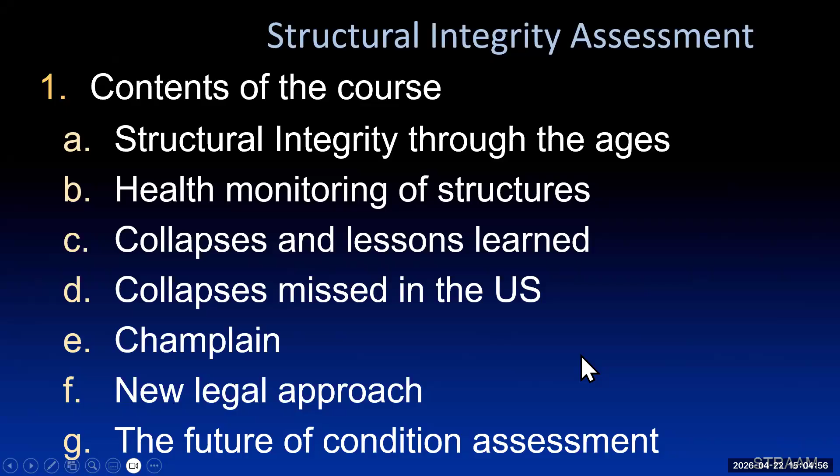This course is about structural integrity through the ages. We have about 10 slides on it: health monitoring of structures, collapses and lessons learned, collapses missed in the US, the Champlain Tower, the new legal approach, and the future of condition assessments.

In the ancient world you had master builders and military domination, structural design by stonemasons and carpenters. They principally did visual inspections - ironically that's kind of still what we do now, and we really should advance that. Technology advanced in the Roman Empire, as you can see with some of the arches in Europe and aqueducts and things like that.

The Romans were really pretty good at building things - many of those structures are still around.

The original approach to structural integrity from the design side was solid and stiffness overkill - they made things really robust, big, giant, massive structures. They believed mass would keep them together.

Interestingly, the concrete from Roman times is actually far superior to what we have now - a lot of it is still around, based on using volcanic ash.

The Romans created domes, vaults, and arches, and there was a lot of ingenuity involved in keeping everything under compression - the foundations provide a reactive force.

For maintenance they had self-repairing concrete, due to the ash used by the Romans - it's really pretty ingenious. Impinging forces were based on experience; they kind of figured it out as they went. I'd like to see how many things actually fell down because they didn't get it right initially. I don't think they were going through steep calculations with huge factors of safety, but they knew it worked because it stayed there.

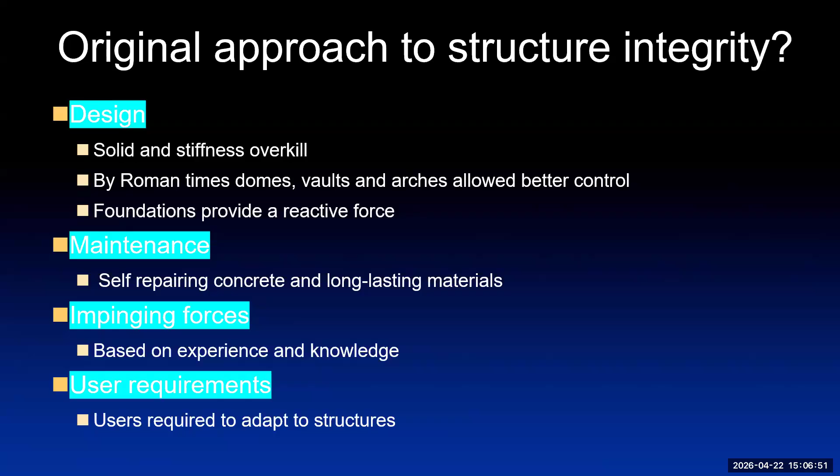User requirements - users were required to adapt to structures. So moving on to the Renaissance.

In the 14th to 17th century, there's a link between medieval and modern times - the Enlightenment, focusing on classical humanism, human potential, and literature. These slides were created by Alan, and I wish he was here to give them since he has more insight into this classical era - artistic innovation by Da Vinci, Raffaello, and Michelangelo, a move away from purely religious workings.

Different inventions, like the Gutenberg printing press, revolutionized communication.

That was really an amazing thing, a stepping stone for humanity. The heliocentric model allowed for worldwide travel and colonialism, ending with religious reformation and shifting political ideas in the Baroque era, with extravagant art and music. So a lot of interesting things were happening during the Renaissance.

The Enlightenment required that laws be rational, uniform, and acceptable. The Royal Society, of which Dr. Geary is a member, actually started in 1660. So they really started embracing science and institutionalizing it. John Smeaton was the first civil engineer.

Separation of architecture and engineering in the West occurred in the 1700s, when we start seeing the first schools of engineering. Then in 1818, the Institution of Civil Engineers was founded in London.

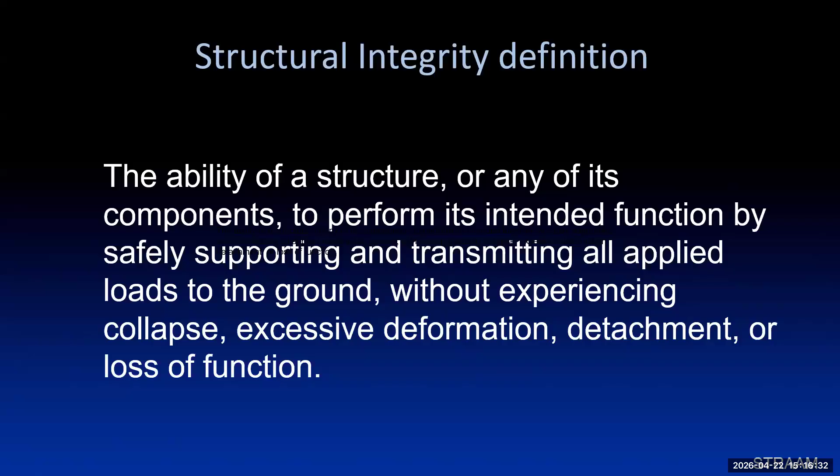So we have that definition coming up, but a general definition is the ability of a structure or any of its components to perform its intended function by safely supporting and transmitting all applied loads to the ground without experiencing collapse, excessive deformation, detachment, or loss of function. So it seems common sense, but I think structural integrity is a term that everybody has their own definition for. And it is defined in the codes, and that's what we as engineers should be using.

Framingham was a building that collapsed. Again, it was very common to things that happen now: rush to finish, poor design, lack of knowledge of required dead loads. Ferry Bridge in 1965 happened in the UK - those were big cooling towers, we've assessed those as well. And winds came and excited dynamic behavior. They were under-designed.

It says misunderstood construction. Alan Davenport, he did a work on the dynamic nature of wind forces. It was all around this time. It was an advancement for wind engineering. That's when Alan started getting his start in the industry.

So this is a really important one. This is still referenced in ASCE 7. Ronan Point is seen as the beginning of structural integrity. It was a progressive collapse from 1968, and some lady in one of these apartments was boiling tea. She had a gas leak. It exploded, it blew out a wall, and this was a manufactured building, and it created this progressive collapse.

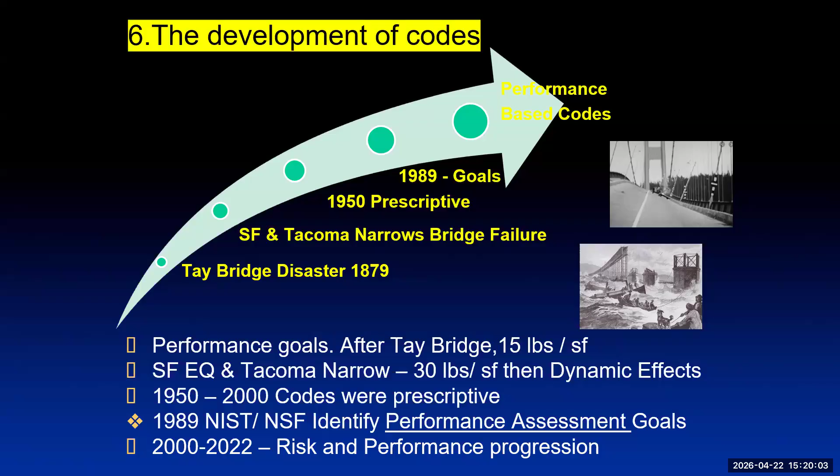There were dynamic measurements and mode or model calibration and a lot of different things. And now we're looking at risk and performance progression. So design standards are looking at performance, and there's performance-based design in ASCE 7.

Some other collapses missed in the U.S.: a department store in 1995 in Korea killed 500 people, and the owner was jailed. In other countries, especially Asian countries, they're much more rigorous about holding the engineer accountable. You can go to jail in other places. Here, you go to court, but your insurance company pays. Over there, it's a whole different animal.

The Rana Plaza collapse from 2013 in Bangladesh, that was tragic. I remember when that happened. 1,300 people died. That's a tragedy. It was a weak building, and they just overloaded it. They had a lot of machinery in there, and it eventually collapsed. A lot of different countries have questionable codes.

It's another reason, a justification for doing measurements on structures to objectively assess them. Because a lot of times these buildings get patched and you can't tell by looking at them if they've lost capacity. A lot of times, just before the engineer comes, they do that sort of patching.

As a matter of fact, for the Champlain Tower, that was one of the criticisms that the investigation showed—that the inspection program they had didn't have any testing, none. People were just mailing in assessments, from what I've heard and what was validated in that investigation. So we've got to get to a point of getting more accurate and effective inspections.

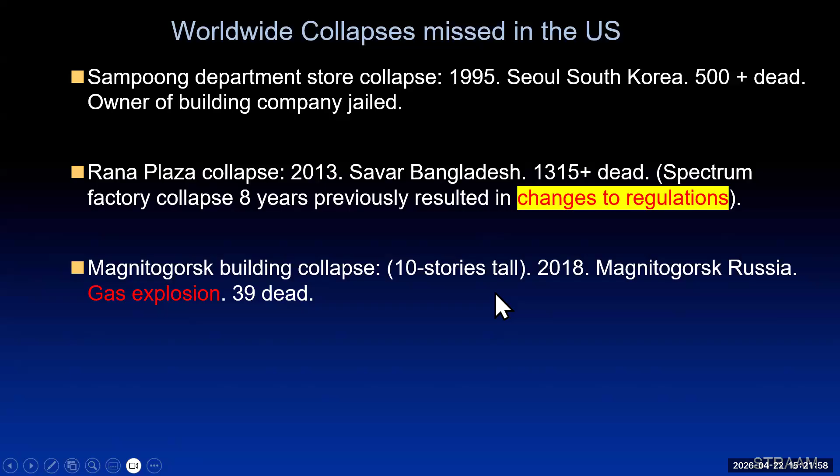So, this building collapse—the Magnitogorsk building collapse, a 10-story building in Russia due to a gas explosion. I didn't know that one. So Alan knows a lot of things that I don't know.

But this is the one that we all know, the Champlain Tower in Surfside. It was a 40-year-old building, just about. 98 people died, $1 billion loss.

What happened with this: in 2018, they estimated that the repairs were $9 million. There was significant damage, and they knew it. And the engineer—a lot of it gets patched, and he didn't really know how to assess it effectively.

By 2020, they estimated it to be 15 million. So in 2 short years, the degradation accelerated. And that's the problem with degradation—that's what people have to realize, is that it's not linear.

Just because you had a little degradation this week, in a year you might have 3 times that. You get chemical changes, chlorides hitting steel, they blow out the concrete, and it can look drastically different very quickly. It can be perfectly fine for 40 years and then look really bad really quickly. That's what was happening there. And the engineer's not on site all the time.

So we advocate for monitoring structures like that, and it makes a lot of sense. Engineers need those sorts of tools.

On June 24th, 2021, this building collapsed. It was a partial collapse, but a significant portion of the building. NIST has done a study on it. It's very interesting—if you want to read it, you should. They hadn't started; they were about to start the repairs, but they hadn't.

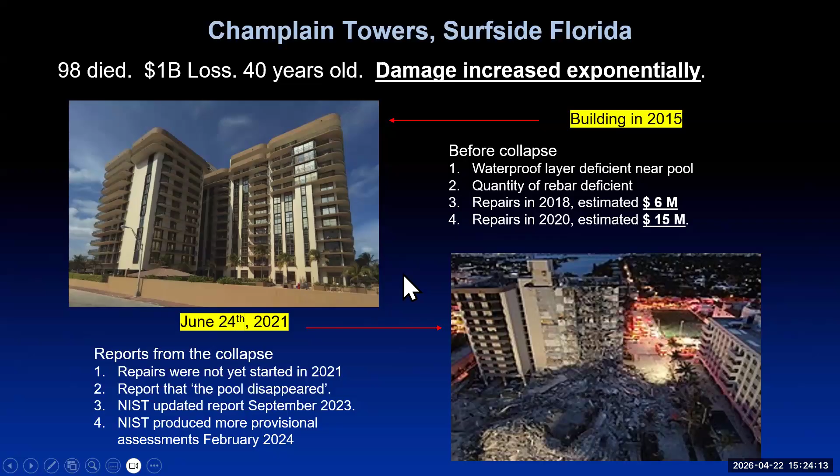What it appears to me is there was a drop beam that was monolithic with the pool deck, which created a rotation of that beam and created the progressive collapse. So it's tragic when things like that happen. But when you see the damage that had occurred, you have to think about the potential of a progressive collapse or subsequent damage that can occur if something goes bad.

But there was quite a lot of degradation in this area here. There were shear cracks right around the columns, and it was pretty noticeable.

These next four slides will show you how the center of this building came down. You had the pool over here, and it pulled on a drop beam, pulling this section down. You can see it moving down, the penthouse floor going down.

I'll show that again. Look right here in the center, you'll see this section go down. It's moving there, it kind of messes up the view, and it's going down further. So the whole thing collapsed in the center, and then it pulled down this side as well.

This side remained, but it's pretty tragic. There were signs from the deck top, so I don't know, would any good engineer have made a lot of noise about this? You had these lateral shear cracks, severe distress in the pool deck at least three weeks before the collapse. You've got to do something at that point, you've got to put some form of monitoring on something that has this level of damage.

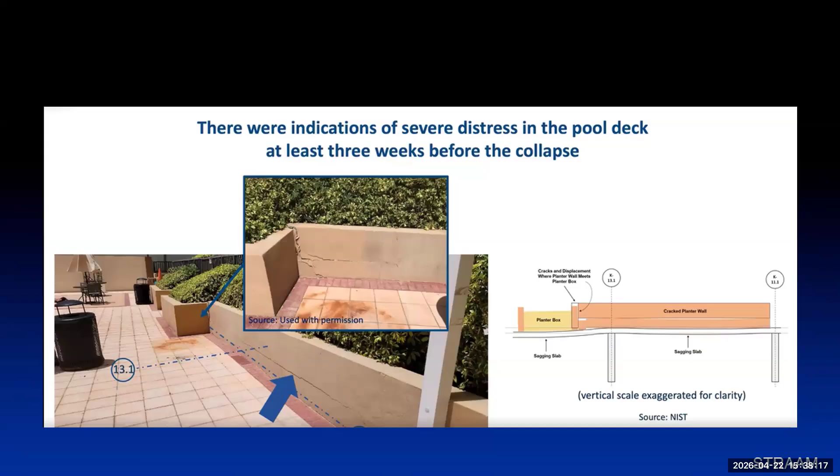What will happen is somebody is having a look to see if they can find an idea of something which is not quite right. You might just walk past this sort of thing. However, in fact, it was particularly important. A horizontal crack is an indication of stresses in that area.

So the immediate response after Champlain was: buildings have got to be safe, and condominiums must be protected against collapse. Inspection for structural safety is a must. Additionally, we must have a reserve fund, and inspection after a specific age is required.

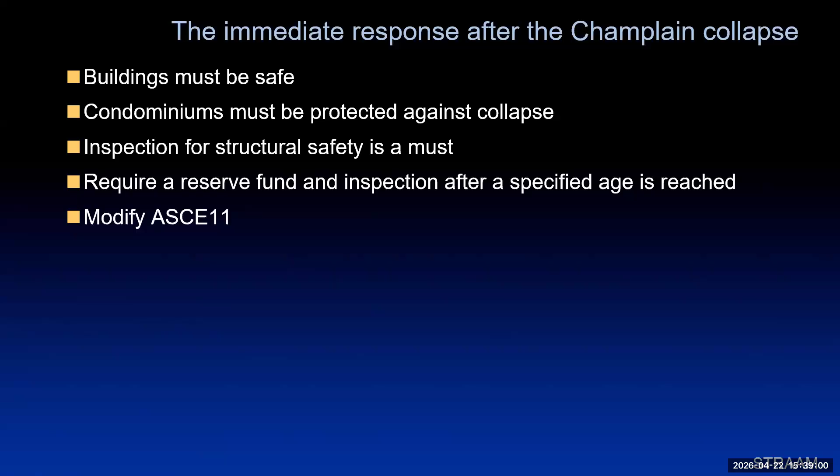Additionally, we could modify ASCE 11, ASCE 7 has a definition of structural integrity. Many codes have actually said, okay, so long as we have that definition in there, then we don't need to worry too much.

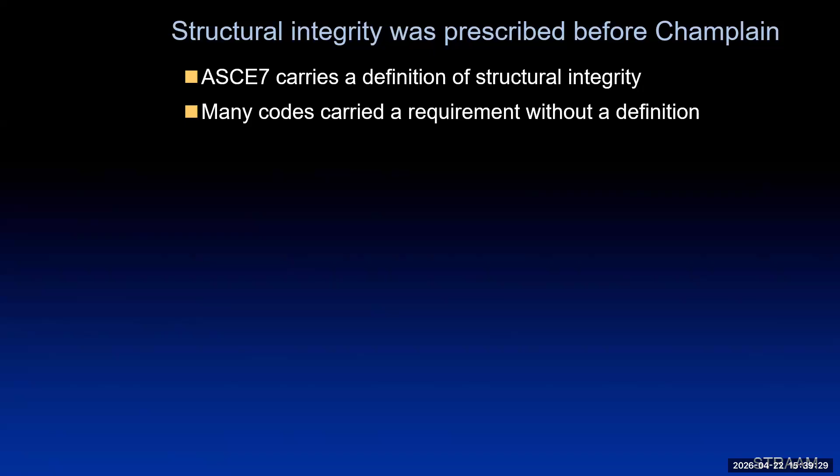And this is it: all structures shall be provided with a continuous load path in accordance with the requirements of section 1.4.1, and shall have a complete lateral force resisting system with adequate strength to resist the forces indicated in section 1.2. In other words, the structure must take care of the forces which will appear on it. So ASCE 7 says you need to do that.

Hey Alan, Alan? Yes. I think maybe I'll just take over, okay. I think the shots probably affected you a little bit. Yes, okay, you go Jim, let me run with it, okay? Okay.

So to pick up where Alan left off, this is section 1.4 of structural integrity. It's in ASCE 7, the 7-22. As Alan said, it requires a continuous load path and a complete lateral force resisting system. And this is really important because...

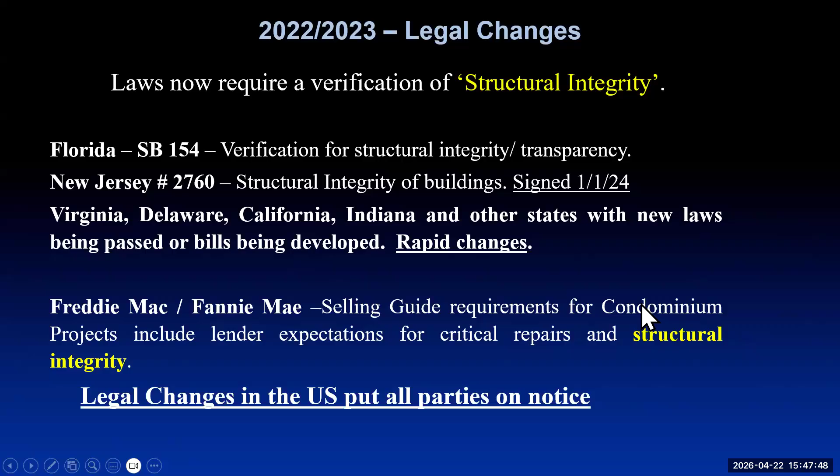And now they can because they can finance it effectively. So that was a big game changer. As I mentioned, all these other states have structural integrity laws in one form or another, reserve studies and reserve requirements - Virginia, Delaware, California, Indiana - and these things are changing rapidly. Also a lot of cities have instituted them. Freddie and Fannie's selling guide has requirements with structural integrity. So these put everybody on notice.

The Florida law, though, is the one that is the most operative and the one that really set the tone. It was signed by the governor in June of 2023, so going on 3 years now. It provides inspection guidelines and implementation. If you read it, all it's really saying is do what's intended under the codes and standards. It talks about life safety, about having all the members functioning, and about reserves and repairs, transparency of information, letting people know what's been done. It set the precedent for all the other states.

Engineer and owner requirements in the law: inspection of load-bearing elements, walls, and the primary structural members and primary structural systems. I'm saying that slow to emphasize it - think about it. Inspection of the load-bearing elements, walls, and primary structural members and primary structural system. So you've got to get a look at everything. The problem is most of it's covered by sheetrock in almost every one of these buildings.

So we were part of the implementation plan of this law, and we spoke during the implementation of this. There was a working group, and you could hear the engineers call up and say, 'What do you want me to do, tear all the sheetrock down?' And the working group said, 'Well, no, we don't want you to do that. You've got to do the best you can.' Well, in their own implementation plan, they also put in load testing, so you can test these structures.

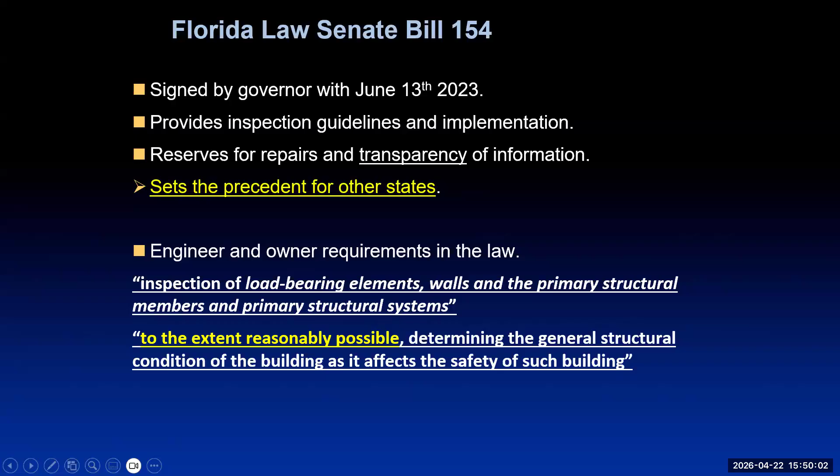So we're sitting here in a world where visual inspections have been the norm - that's been the standard of care. The law has changed, and it specifically says you've got to look at every single element. And if you can't see them, you've got to go to Plan B, and Plan B is testing. It also says, to the extent reasonably possible, determining the general structural condition of the building as it affects the safety of such building. So again, you can't stop at a visual - it really doesn't make any sense.

So, milestone inspections for Florida: the legislature finds that maintaining the structural integrity of a building throughout its service life is of paramount importance in order to ensure the buildings are structurally sound. So it's not just something where you're inspecting it once - this is going to be done every 5 to 10 years. New Jersey has the ability to be as low as 5, I think - the engineer there can say when the next assessment comes. 10 years is the standard right now. But anyway, the point is that this is for the entire life of the building.

So doing things that are objective, documenting small damage that could turn into big damage, is really important. Performed under the direction of an architect or engineer licensed in the state of Florida is for the purpose of attesting to life safety - that's really the code requirement for having capacity. Again, in ASCE 11, the first thing under preliminary assessment is capacity, adequacy of the structural components of the building. So if you can't see them, you've got to do something - you can't just sign the document without knowing the general structural condition of a building as it affects safety, including safety, repairs, replacement of structural components to the extent reasonably possible.

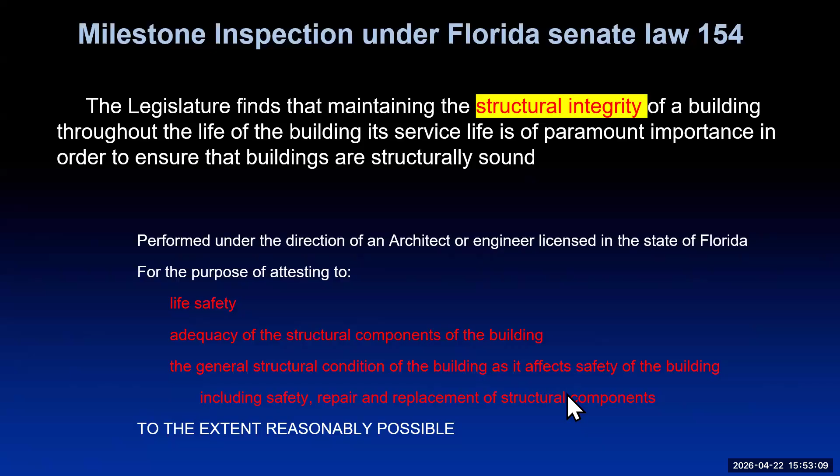Now, the point about this is that what we are doing at the moment is a function of what's happened in the past. Let me just... there we go.

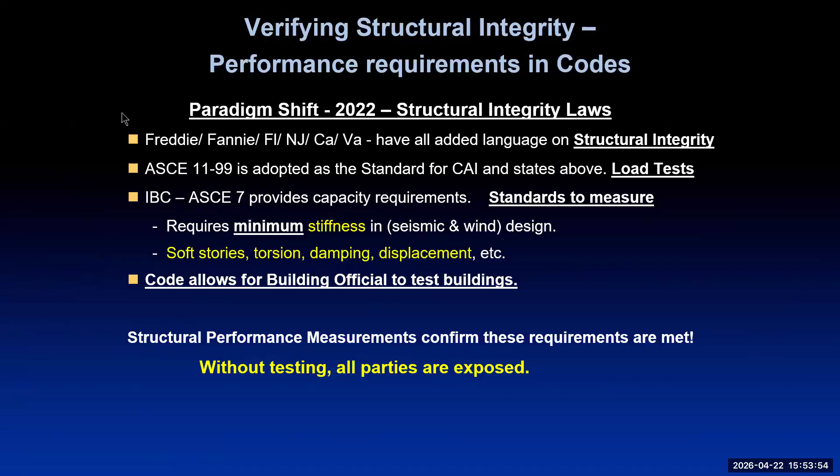So collapse prevention has been an issue for a long time. Now I want to go back further. I want to talk about what happened to bring us to the current state and give you an impression of what's happened and why it's happened.

So the Renaissance in the 14th to 17th century was a link between the medieval and modern eras. They focused on classicism and looking at human potential and literature. And so you had people like Leonardo da Vinci, Raffaello, Michelangelo, who changed various things. But one of the things that happened in the Renaissance was the Gutenberg printing press. It actually revolutionized communication between people who were doing research and their colleagues.

Now imagine you think of that as a parallel to what's happening today with the internet. You actually got something which changed civilization. Additionally, we had the Copernican heliocentric model. In other words, that means the sun is the center, and you can do all sorts of things.

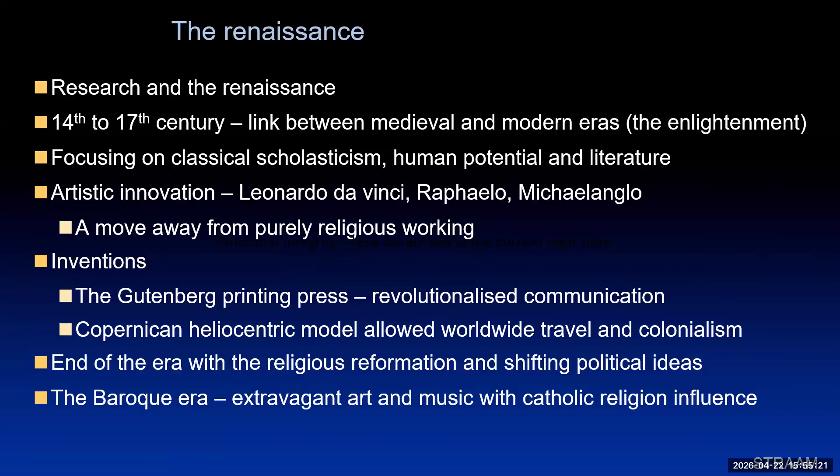But this is the big one: 450 BCE, Roman law introduced the 12 tables. You have that in US law of these days. It's in your laws, and it says everybody has a right to certain things. They are in these Roman laws, and in the 6th century, Emperor Justinian included these.

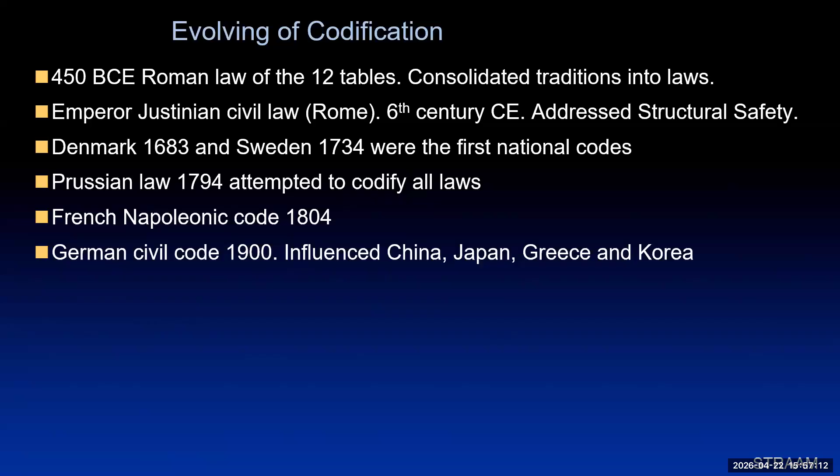But essentially, what we got from there is that the codes were written. The law was something which people knew what was going to happen. They could read it, they could see what was going to happen. On top, you can see this is all European as well. So the German civil code in 1900, influenced China, Japan, Greece, and Korea.

The important thing, though, leading up to what Tom's been talking about, is that we have changes and influences since 1900. We had 1900 to 1950 allowable stress design. This often led to a safety factor of 4. So we designed for composite action, for instance, different forces coming in from different places.

1950 to 1970, we had load factors, and these simply had dead loads and live loads for separating these loads out. It was a start of standardization and awareness of dynamics as well. In 1970 to 1990, we had probabilistic design, which is the use of return periods, and we looked at structural reliability analysis. Uniform codes started being apparent.

And then 2000 to date is the sort of thing that we're talking about right now. And this one is particularly important because safety factors started when we had cast iron, and cast iron was a horrible material to operate with. So we had a safety factor of 4 in the 19th century. We used to know it in the 1960s as a factor of ignorance.

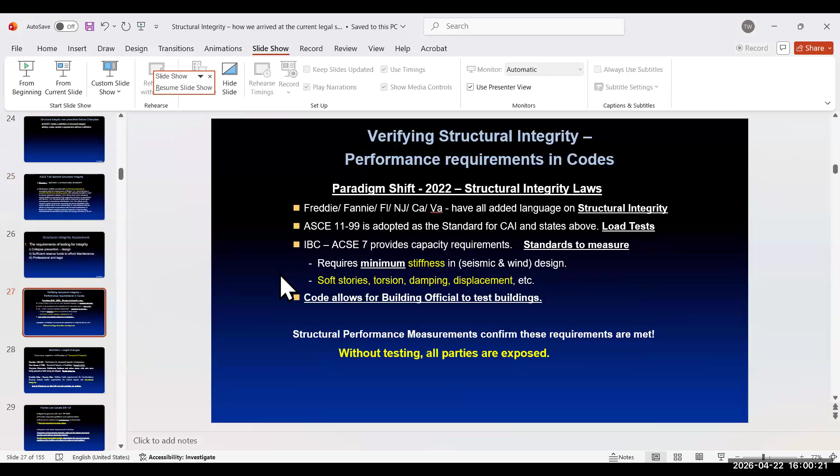Okay, I think we had gotten to this point. So milestone inspections consist of 2 phases. We talked about phase 1 and phase 2. Let me put the current slide there.

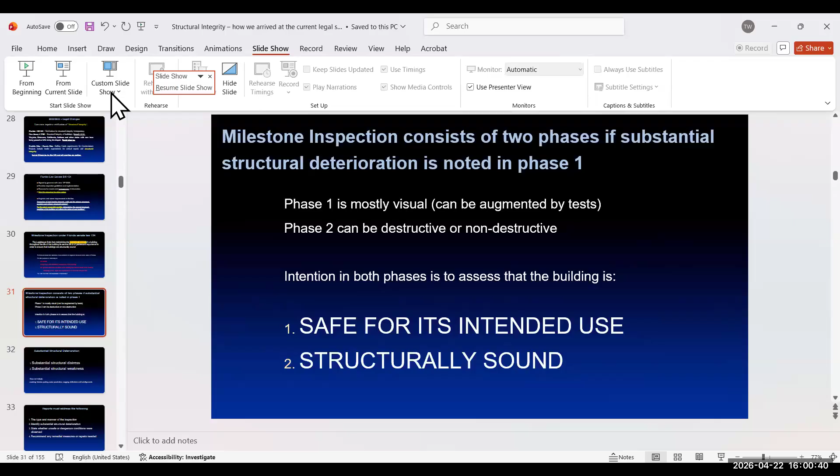In Florida, if you lose a third of your lateral capacity, you have a significantly damaged building. So this is really important too, that there are goalposts. You know what a building should be doing, how it should be performing. You can measure that. But there's also minimums in the design code of...

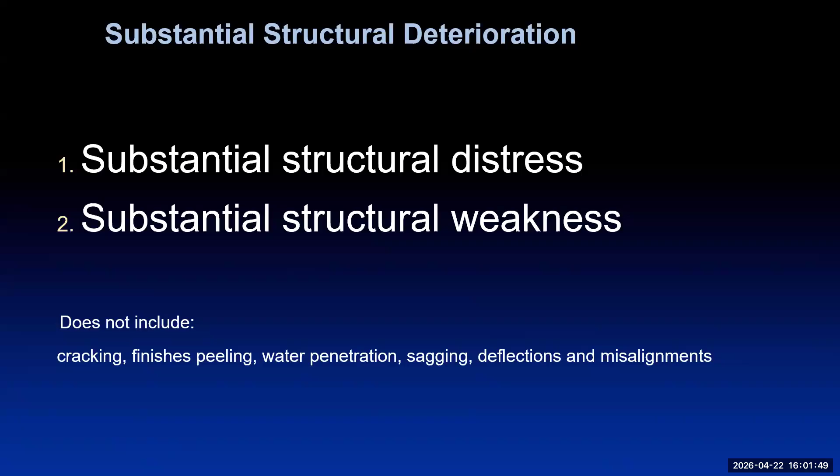So that's why visual inspections aren't really getting us where we need to be. We're not tracking this stuff. It needs to be tracked.

So reports must address the following: the type and manner of the inspection, identify substantial structural deterioration, state whether unsafe or dangerous conditions were observed, recommend any remedial measures or repairs needed. So definition of substantial structural deterioration.

I jumped on this one - I'm not familiar with the slide, sorry about that, so I got ahead of it. But a reduction of 33% of lateral capacity and 25% of the load bearing capacity vertically. So there are requirements here.

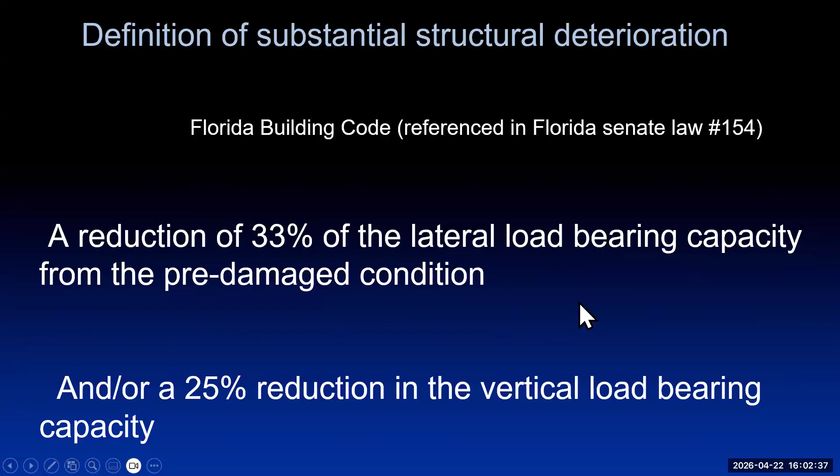The New Jersey law, very similar to Florida. It also set the precedent for others. Appropriate procedures for inspecting, evaluating, and maintaining the structural integrity of residential housing. Very similar to Florida - they modeled this after Florida.

Primary load bearing system means the assemblage of structural components within a building comprised of columns, beams, bracing that by continuous interconnection form a path by which external and internal forces applied to the building are delivered to the foundation.

That's fundamental to design, and it's fundamental to the term structural integrity. They all have to work together. They've got to distribute the forces. The structure should behave in a monolithic fashion, and all the forces need to get to the ground, and it needs to be stable, and it needs to meet life safety requirements.

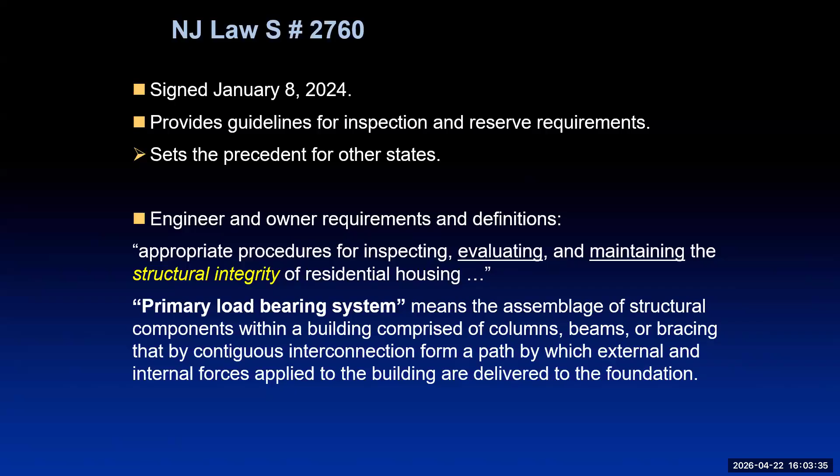So I think we went over this already - the different states. I didn't mention Georgia, Hawaii, Tennessee, New York. New York City has a law as well. Several states are exploring building inspection requirements.

And as I mentioned, the ICC 1500 is coming. So we are at a point of change, and everyone's got to be aware of that. Doing things the way you were doing them - people need to become more educated about what can be done. What are the testing methods?

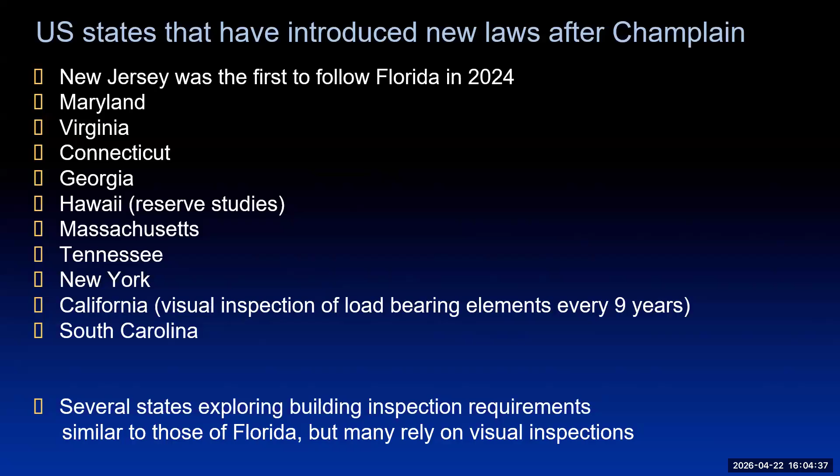ASCE 11-99 and now MOP 158 provides all that stuff. 90% of that document is about assessing material degradation and structural degradation. So it's really important for people to be aware of it. And I'll be honest, of all the engineers I spoke to, nobody knew ASCE 11 unless you were into the condo world. So there's an enormous learning curve needed for the industry as a whole.

So the New Jersey law continued to determine when the next inspection shall be. If you got a degraded building, you want to do more frequently because of this issue of exponential degradation. Protocol established by ASCE or other standards - again, just like Florida, they reference ASCE, provide guidance on maintaining structural integrity.

So what needs to be done differently? If you have a building that's degrading like it was down in Florida, A, you got to quantify its capacity, but B, you better protect it and seal the concrete and do things that are going to preserve it more effectively. And there are a lot of things that you can do.

So you have to identify new or progressive deterioration. And this is a slippery slope, because how do you know? You may be the first inspector there and you just don't know what you're looking at. People are patching and painting things regularly.

One thing we didn't talk about was the collapse of a building in Iowa. Most people don't know about it. It happened in Memorial Day weekend of 2023. It was a building that was recently purchased, it was 100 years old. It had been through a big wind event and it had serious signs of degradation. They didn't respond. The city got sued for $100 million for negligence.

And that's because there were signs of deterioration, but they didn't do anything about it. So at a minimum, you can monitor things and make sure it's not changing. More aggressively, you can put up shoring and all kinds of different things. We've had instances where we were in charge of a building and we said, everybody out, let's put up shoring because this is unsafe. So that is within our purview as engineers.

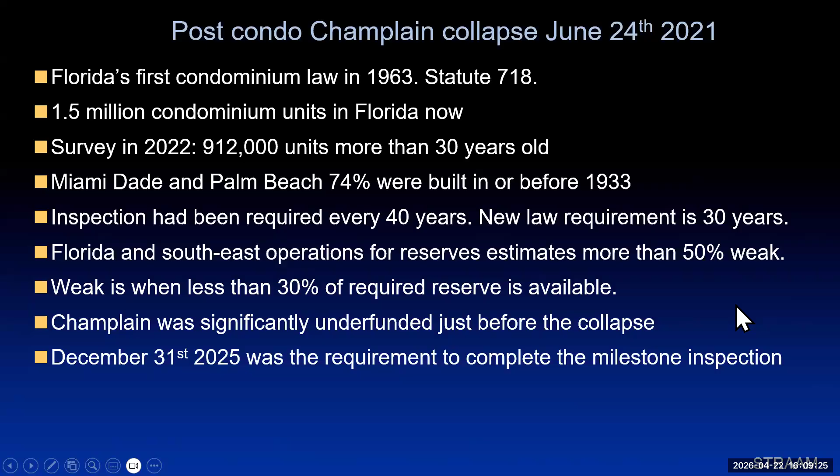December 31st was the requirement to complete milestone inspections. I think it may have extended that, Alan. I'm not positive, carry on. It's in there. Oh, okay.

Changes in Florida in 2025: structural integrity and reserves. Milestone inspections now limited to buildings with at least 3 inhabitable floors. So we knew that. Architects, engineers, and contractors must declare a conflict of interest. This is what I was mentioning about that. This was the new law that came out. Local enforcement must report to the state, so the building department's got to upstream this information.

Structural integrity and reserves can be funded through assessments, loans—this is a big deal—or lines of credit. That was something they couldn't do before, and this actually gave them a big lifeline. Uninhabited buildings reserve funding can be paused. 4-family dwellings do not require a structural integrity reserve study. Associations existing before July 1st, 2022 may delay structural integrity reserve studies up to December 2025. SIRS delay: associations completing SIRS studies may delay for 2 years. So it gave some relief.

There was a lot of complaints by all these condos who said, we have older people who aren't liquid with a lot of money, we need time to get this stuff together, we never had an engineer. A lot of people just kicked this can down the road. So they did what they thought was reasonable to help extend this. But the good news is they can finance these things and push them out over time. And it doesn't let them off the hook on the requirements. The secret thing is you still got to do the proper assessment. You got to do the proper understanding of the structure's capacity and potential life. You got to make sure structure integrity is maintained, and then they got to have reserves.

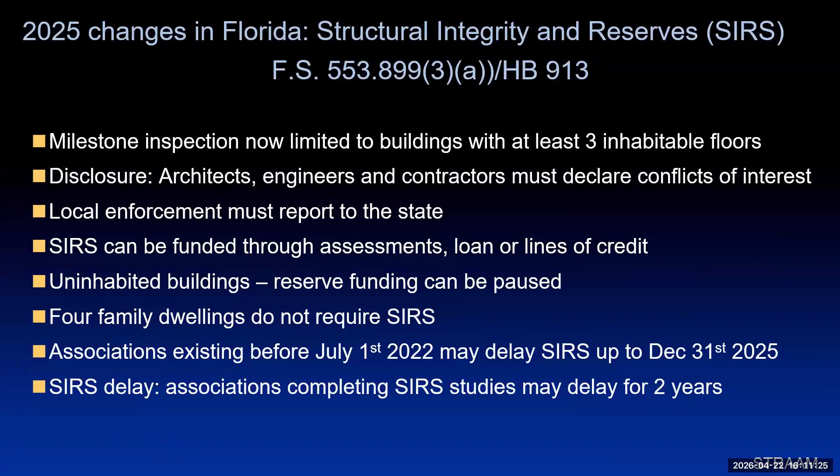Milestone inspection of structural components is required by December 2025 for buildings with a certificate of occupancy on or before July 1st, 1992. For buildings less than 30 years old, the milestone inspection is required by the year the building turns 30, or 25 if closer to the water. This applies to buildings of 3 stories and taller.

Inspections are required every 10 years after the initial milestone. Municipalities may require inspection after 25 years, especially if the building is closer to the water.

Associations must forward copies of the report to all owners within 45 days. For us, we do a lot of testing, and there's a requirement: if you do non-destructive testing, you have a 1-page cover of that report that goes with the inspection.

So there were considerable problems after the change in law. Monthly payments increased, insurance rates increased dramatically, costs skyrocketed, and property values went down. This was a big shakeup and wake-up call, but it was really necessary. It was being quite irresponsibly managed. You had people on the board...

I can tell you firsthand experience, we were dealing with one board, and 7 out of 8 people wanted to move forward on some very pragmatic aspects. And one guy said, I'm moving, I don't want to spend a dime, and I don't want our reserve requirements to change. I'm fighting all the reserve requirements. So it's really interesting that one guy can be the cog in the wheel.

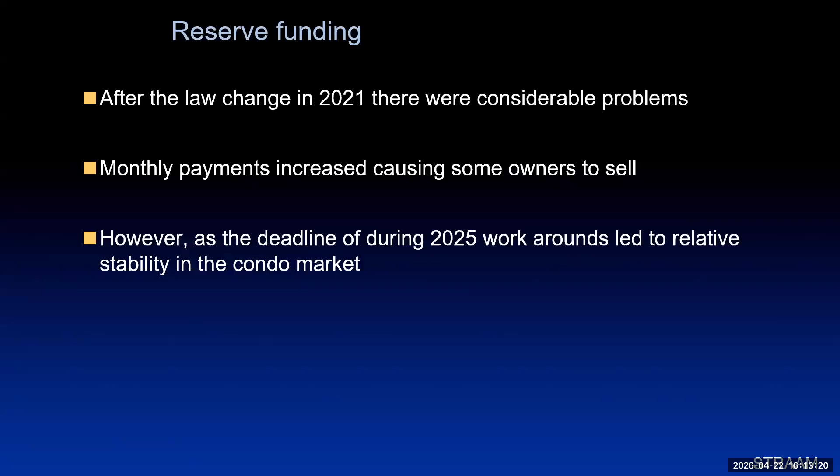And that's why they had to put it into law, because people who were not qualified to make these decisions were the ones restricting things from getting repaired, and it puts people at risk. So engineers have a much greater requirement now and a lot more liability. And that's why testing makes a lot of sense—having objective information to validate your assessment reduces your liability.

Milestone inspections are required immediately. Let me jump in there, Tom. Yep, if you actually missed one of these deadlines, then a milestone inspection is required immediately, and there is a concomitant legal liability to the association. Normally, if you get a notice about milestone inspection, it must occur within 180 days.

Back to you, Tom. Okay. Structural integrity assessment procedure, stage 1: visual inspection. In Florida, they have a very prescriptive sort of visual inspection, a big checklist—the biggest checklist I saw out of any state. So you go through that first, and you establish the assessment area and the consequence area relative to an influenced area.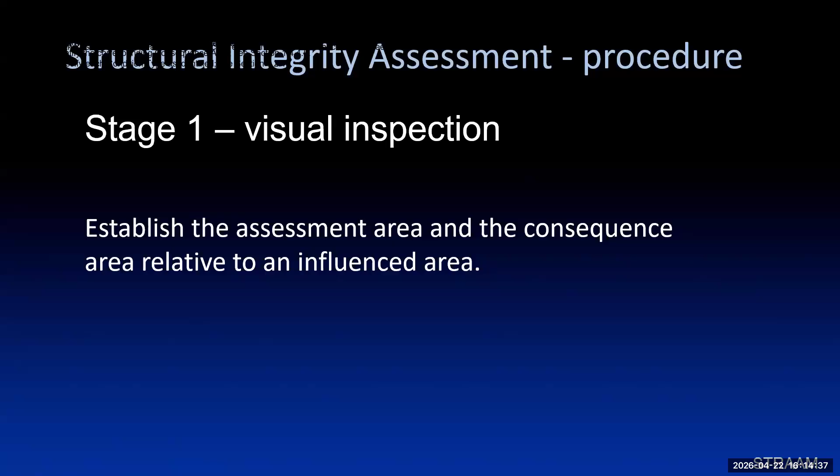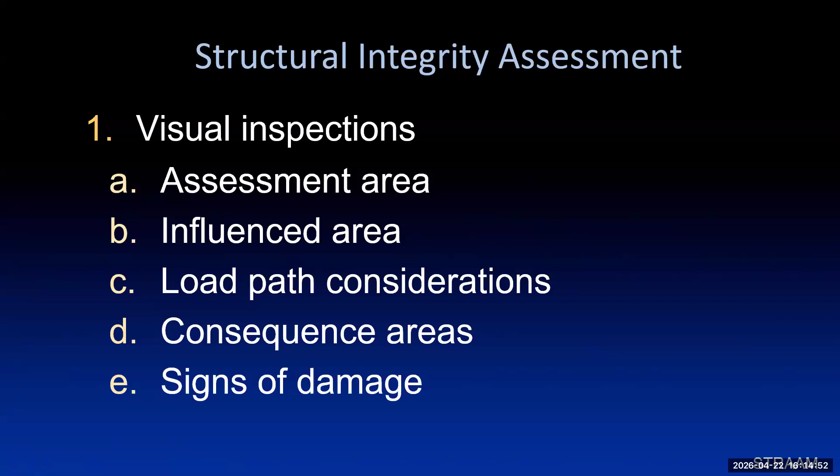So you're basically doing a walkthrough. You're not getting into every apartment, you're looking at the common areas and making an assessment—the influenced area, the load path consideration, the consequence areas, signs of damage. But realistically, a lot of it's covered up with sheetrock, so you can't see all of it. So what is not reasonable: inspecting every structural element, assessing all structural elements, assessing structural integrity using visual only inspection, and using engineering judgment only.

You can take a risk and look at a newer building and say, I feel pretty comfortable with it, I'm going to use my engineering judgment. Engineering judgment is a legitimate defense, I guess, but you also are conflicted with the requirement to validate assumptions. So an engineering ethical requirement is to validate your assumptions—if you have any reason not to be sure about it, you can test it.

ICC 1500, there's a draft out, and it's the same sort of thing—when you have damage, you've got to take some additional action. And what is that additional action? Well, it could be testing, repairs, or a lot of things. But having some cracking isn't necessarily significant damage, or it could be very significant damage in the way of the Champlain Tower—that's where your judgment comes in. And when you have damage and you don't test, you take all that risk. So it really does change the landscape for the engineers.

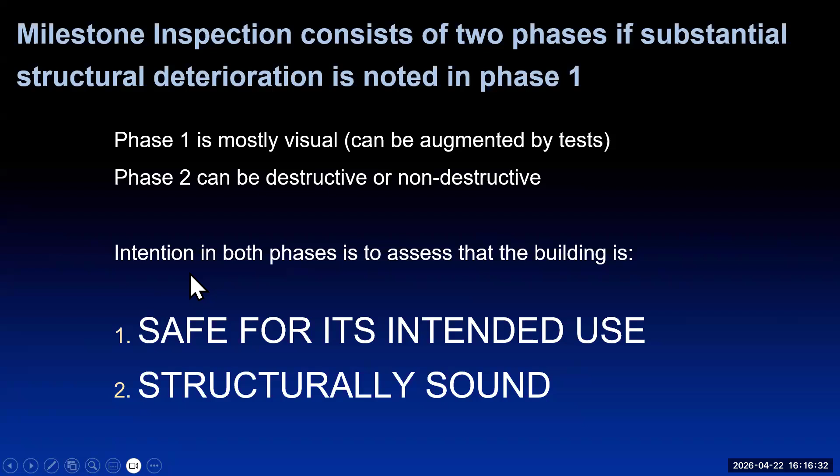So the milestone can consist of two phases if a substantial structural deterioration is noted in phase one—phase one is visual, phase two can be destructive or non-destructive testing. Didn't I already do this? I thought I did this. I think this is a double slide, Alan. The intent—okay, move on soon. Yeah, maybe these are doubled up.

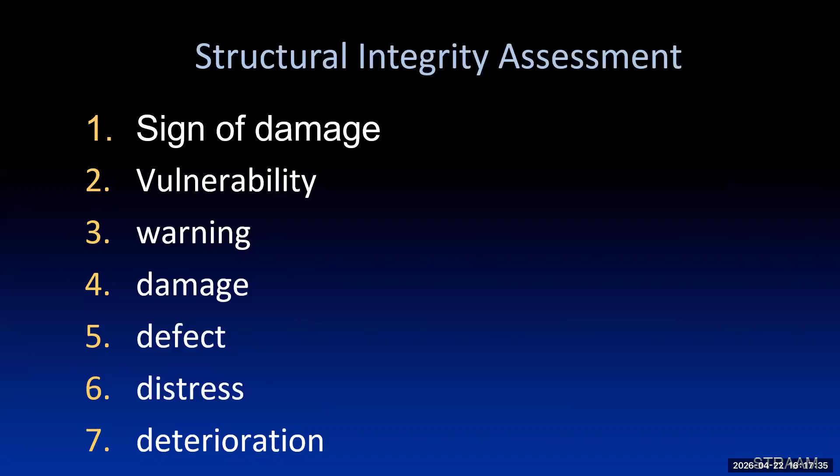Structural integrity assessment signs of damage: vulnerability, warning, damage, defect, distress, deterioration—they're all common terms, and this is a categorization. If you go in to take a look at a building and you're doing a visual inspection, it's moving towards deciding which of these categories your building actually appears in. You have to know the definitions in each of these categories. They're being discussed at the moment, and I'm sure they will come out, but nevertheless this is an idea of what ASCE is moving towards. We are left with a series of problems.

Legislators have rushed to provide laws that will make condominiums safe, especially in Florida. But what exactly is safe to human occupants? Design assumes a level of risk is acceptable, but when that risk changes, we need to understand it. How can inspectors decide on safety or the level of safety? The environment is changing. Is the current assessment style going to provide us with acceptable safety? This scenario has been repeated many times.

But nevertheless, he was the scapegoat, and he died in penury. Only 100 years later, we found out that actually he did everything that he could, but it was no salvation. He was still the scapegoat.

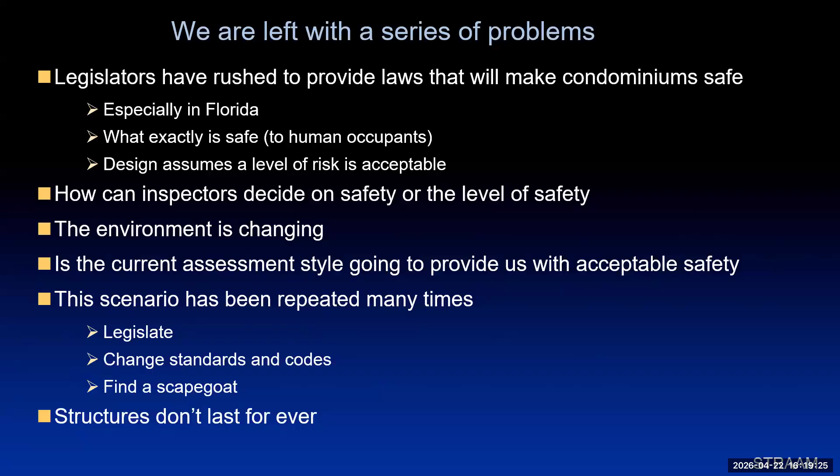So these are interesting slides that Alan took many, many years ago. Let me come back in here, Tom, because there's an important point in this. These are scanning electron microscope studies of concrete.

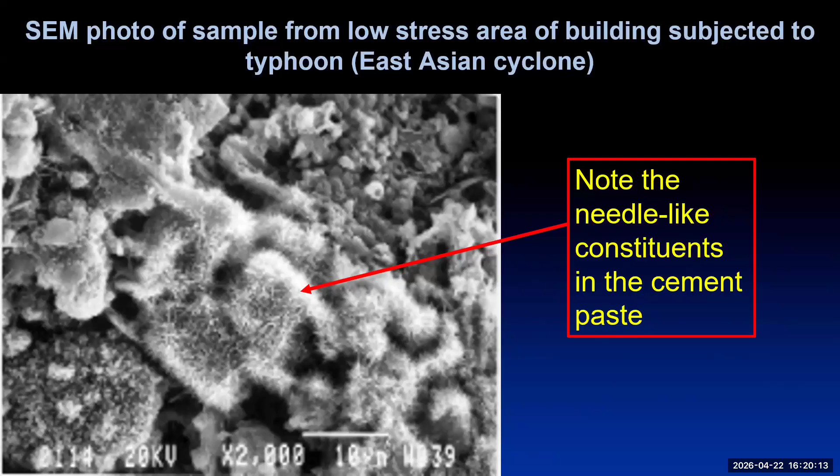You can see the aging process occurs at a very small level. If you look at this scanning electron microscope image of a concrete sample taken from a low stress area of a building in Hong Kong subjected to a typhoon, you can see that there are needle-like constituents in the cement paste.

After a typhoon, look at it. It's totally different. The broken needles occurred. The chemical composition of the concrete changed just because of high stresses in that area.

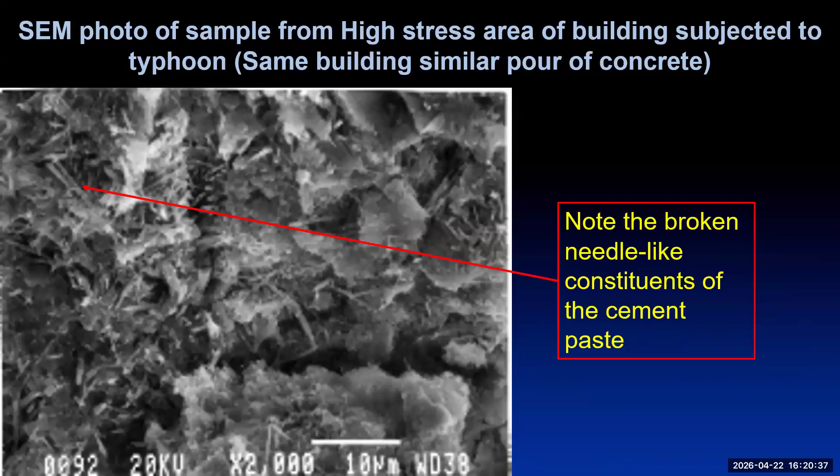So the point that we're making here is we look at this sort of thing, nodal force and nodal displacements, and we do experiments in the laboratory. We use Young's modulus quite often, but there is no such thing as a linear elastic range. It's a good approximation for what's going on, but when you look at those scanning electron microscope images, you see that down to the micro level, there's an awful lot going on. And there are indications of damage and aging which occur in the structure over a long period.

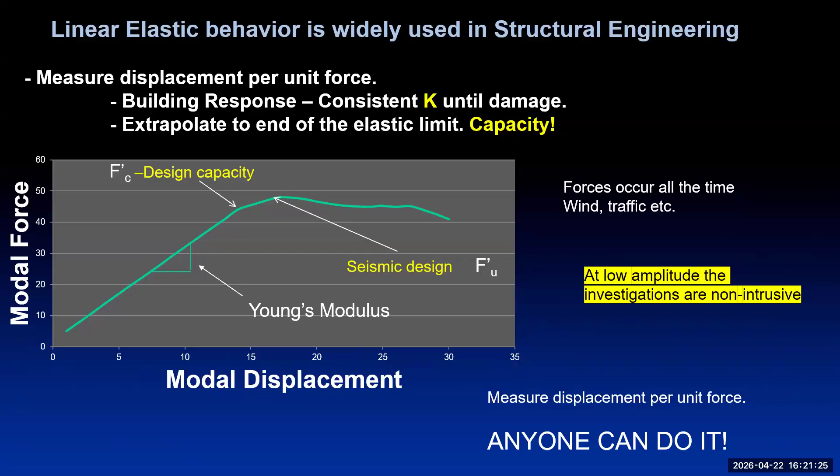And of course, this is what we do with a stress-strain type of diagram. So we actually have to look at what the demand forces are and what the capacity of the structure is, and we have to establish the capacity to demand ratio. If our approach to finding out the integrity of a structure focuses on that capacity to demand ratio, we can tell what the ratio is of the risk that we have in operating a structure.

Back to you, Tom. Okay, so as I mentioned before regarding ASCE 11, they had a holistic load testing approach. There are different ways to do it, like directly applied loads. That's what Alan Geary did with his team at the BRE. They actually created a vibrator system and dialed that loading to a thousandth of a hertz and applied one ton of force to a building and shook it at resonance. You can do proof loading, dynamic load tests, in situ loading, and comparison with prescribed criteria.

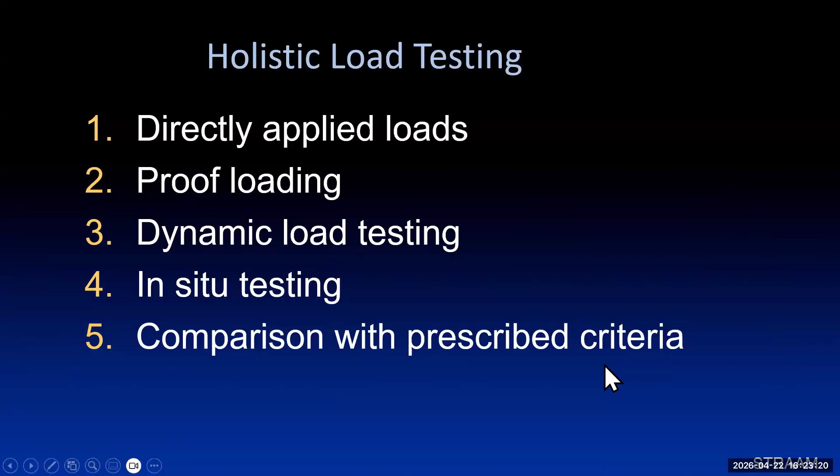So condition assessment: watch, advisory, and warning. Doctor, why don't you talk to that? Well, in fact, these are three categories. If you go in and look at a structure, there are three categories that you will put that structure into. Watch means it's okay for the moment. Advisory means we found something that is worth looking at. Warning means there's something important, and you need to do something about that right now. So basically, there are three levels that you're being asked to look at and assess the structure.

So load testing, laboratory testing, and in situ testing.

Interestingly, if you look at load testing on YouTube or Google, a lot of it is static load testing. There are people out there doing dynamic analysis. A lot of the bigger firms, like Thornton Tomasetti, have a testing department. Wiss, Janney, Elstner, they do all kinds of testing of structures. So there's quite a lot of people who do all kinds of non-destructive testing.

But you can test materials in the lab, and you can also do in situ testing. You can test the entire structure for its response, which is one of the approved methods. So you have laboratory testing, where you take a specimen, put a load on it, and look at how it displaces to get the force displacement relationship. Everybody who's an engineer is familiar with doing some of that.

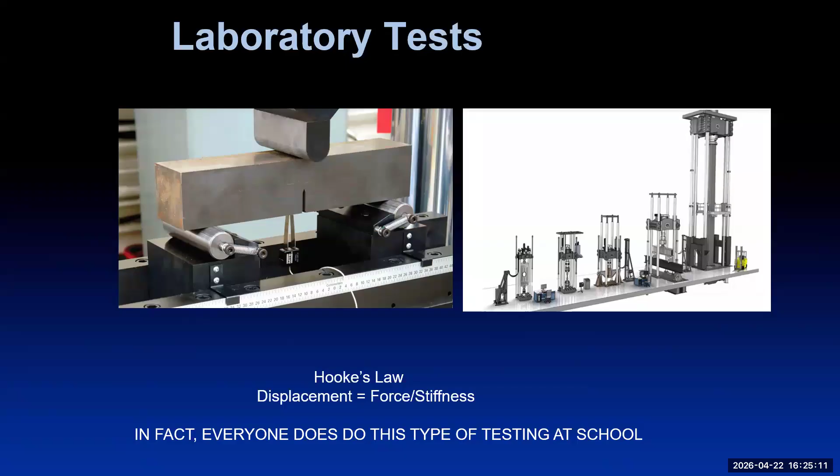This was what Alan did at the BRE, looking at how structures respond. He took this counter-rotating mass that created a ton of force linearly, put it on the building, shook it at resonance, and took measurements. We have some of those reports on our website. Fascinating body of work that's never been repeated. He did 40 full-scale structures. If you look at other people who did vibration tests like this, they might have done a handful over their entire career. But Alan did 40 of them, large dams and smokestacks and buildings all over the UK and Europe. So quite an interesting body of work.

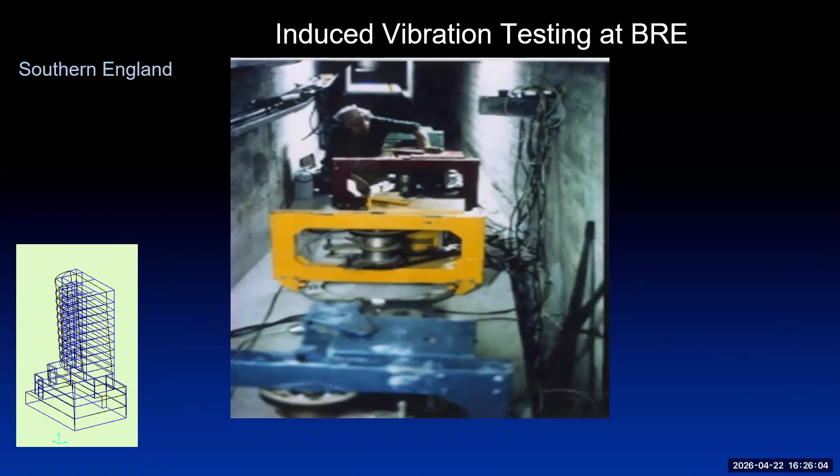The assessment of capacity and risk. What are forces is the whole idea. And the first thing is the linear elastic range, which only lasts for a little while, and then we have ductility.

And if we put a capacity diagram, we find what the response is at resonance, then we can have the displacement per unit force. On the right-hand side of the equation, we have zeta, which is the damping, F squared, which is the frequency, and M, which is the mass of the structure, the modal mass of the structure. So we can actually assess what the risk of a structure is by using this equation, displacement per unit force. Instead of using a force and finding out what displacement we go to, we find the displacement per unit force.

In much the same way as Hooke and Newton envisaged, we're doing that now. We can use a number of different things.

To talk to this for a second though: displacement is a function where, if force is over here, you have force divided by damping and frequency squared. So displacement under the same force is a function of the square of the frequency. If you measure that, you get a good idea of the overall stiffness - this is a proxy for stiffness. Damping is directly a component of this equation as well. It's really important to realize there's a squared relationship, so as you lose stiffness, you're going to get a squared relationship with much greater displacements.

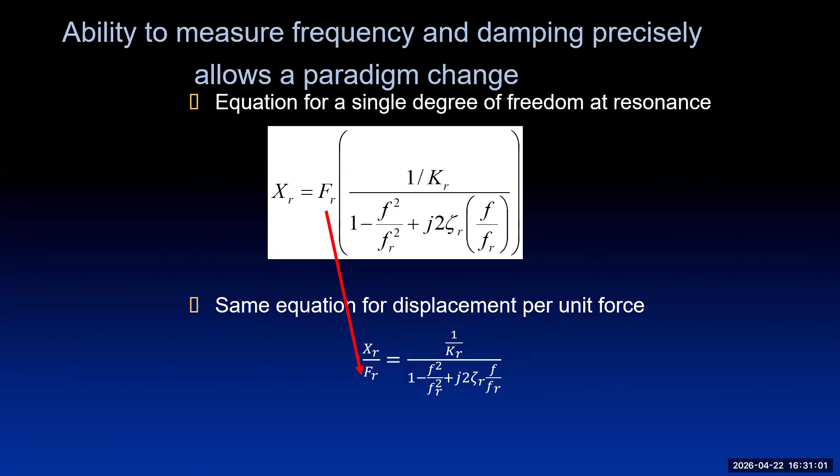The other thing is that statics is just a special case of dynamics. We take Newton's second law of motion, we have that equation, but the bottom right is the curve which gives you a dynamic magnification factor, which occurs if a structure is behaving inside its resonance. So we tend to look at things in terms of statics, but dynamics is important, as we've seen in all sorts of ways.

I think the important thing, which I presented on yesterday, is that there is no statics. Statics is just the dynamic equations when the frequency goes to zero. So we're misleading people. We're developing a tech lab to help people understand, starting with the equations of motion and looking at statics as a unique case of dynamics as opposed to an alternative methodology.

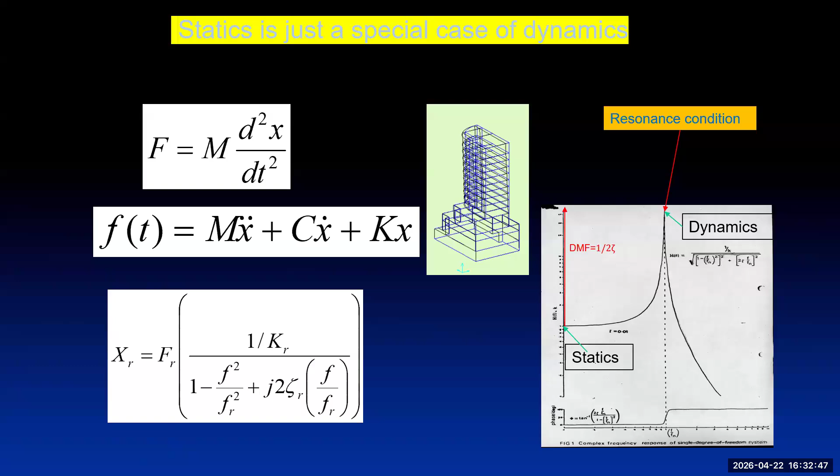I think there's been damage done to the engineering community. If given the choice between doing a dynamic analysis or a static analysis, people just say, I'm going to do a static analysis. There's a fundamental belief they're different, and they're really not. They can be performed differently, and they're more simple, and that's why people choose it. But dynamics are the fundamental science that apply, and understanding them is really important. Then when you understand them, you can apply them. Undergraduates don't get a background in dynamics, but it's important that we teach this properly.

Indicators of damage using dynamic load testing include changes in frequency, changes in damping, mode shape anomalies, and modal ratios. Modal ratios are both the ratios between the frequencies and also in the amplitude between different measurements. These are things we look for in dynamic analyses. As these things change, it quantifies the overall change in signature, which represents the entire stiffness relationship within the structure.

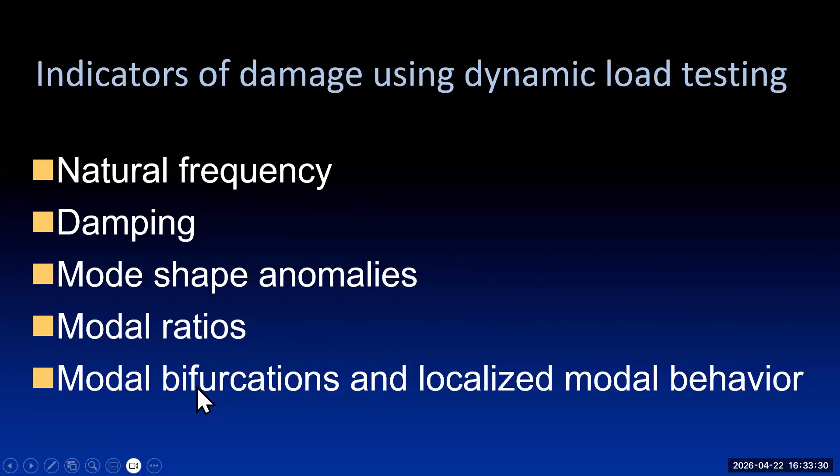Indicators of damage using dynamic and natural frequency, future approaches: use of AI requires data from many locations, requires automatic analysis, identifies where maintenance is needed, self-repairing materials, the Romans did it, identification of changes in aging, identification of damage caused by various sources—environmental, wind, wave action, earthquake, flood, malintended people, impacts, warfare, accidents.

The thing about AI is that it's going to have a very large impact in the world. Taking dynamic measurements on a structure, if you can do it quickly, we can do it in a day, gives you the ability to physically measure it. If we're going to rely on AI as a tool for engineers, and it's already getting involved in design, we need to check it, so we need to have checks on AI. I personally find that AI has a lot of problems and makes a lot of mistakes, so we got to be careful. We got to just check its work.

Absolutely right. And in fact, the slides which follow talk about this. Digital twins—people are talking about that as though a digital twin will tell you everything about a structure. It won't, because it depends on how much the person doing the analysis has actually put into that digital twin, that finite element program. In practice, there's an awful lot that can go on, and we've found differences from measurements of quite often 50% difference from what we actually measure.

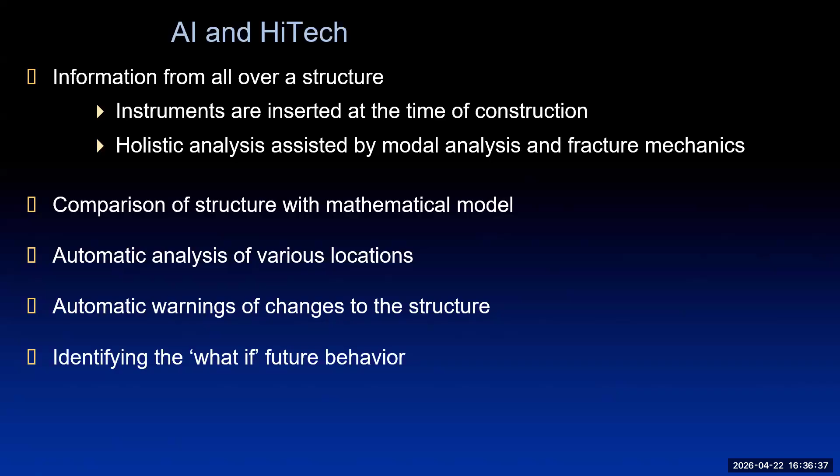This ties right into the concept of sustainability and resilience, which is broadly applied, but there's really no metric. Through dynamics, you can create a metric. So how are dynamic measurements taken?

To get a holistic analysis of a structure, you put sensors on the top and validate how the structure moves back and forth in different directions. You get higher order modes, vertical modes of the structure. You're also measuring from up here how the structure behaves in its geotechnical conditions. Again, there's an ISO standard about evaluating structures.

It generally takes about 3 to 6 hours to get the dynamic characteristics. The first pass is in 1 to 2 hours, and you can get at least an understanding. You may not be statistically correct, but you can get an understanding of some of the dynamic characteristics. And data can be processed quickly.

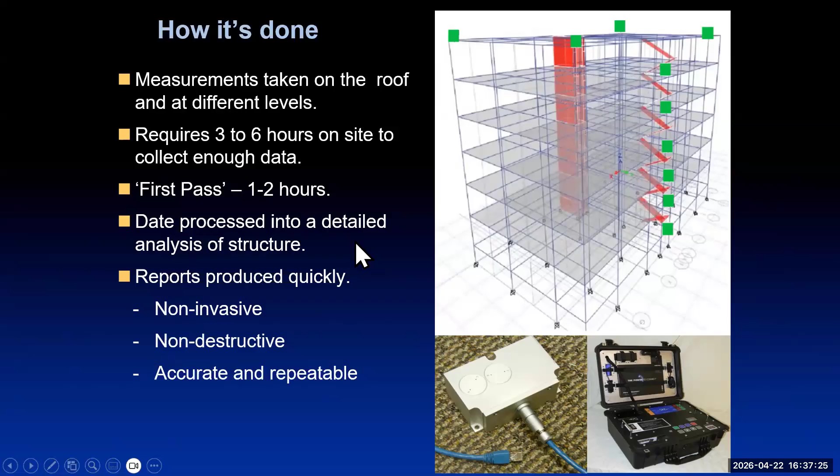It's non-invasive and non-destructive. These basic techniques already existed back when Alan was doing his work for the BRE in the 70s and 80s. We're just using technology now that allows his $200,000 analysis to happen in hours at a tiny fraction of the cost.

The forces are provided by the environment, just ambient forces. The instrumentation includes Wi-Fi, embedded sensors, signal to noise ratio that has to be appropriate, microchip devices, MEMS. They have very sensitive MEMS devices now that are much less expensive. So on every level, the processing, the equipment, every aspect of it has gotten more efficient.

The analysis techniques include modal analysis. If you're not familiar with modal analysis, email us and we'll send you a link to some websites. Modal analysis is an incredibly powerful tool. They do this on the Artemis rocket, the space shuttle, large ships, tall buildings, and long span bridges. But you can do it on all structures, and you can do it efficiently.

So you're looking at stress on a micro scale and applying fracture mechanics. We talk about PPV as a metric for vibration monitoring, and it's not very accurate for that sort of approach. But modal analysis gives true displacements of a structure, and frequency content that can be measured and monitored for the life of the structure.

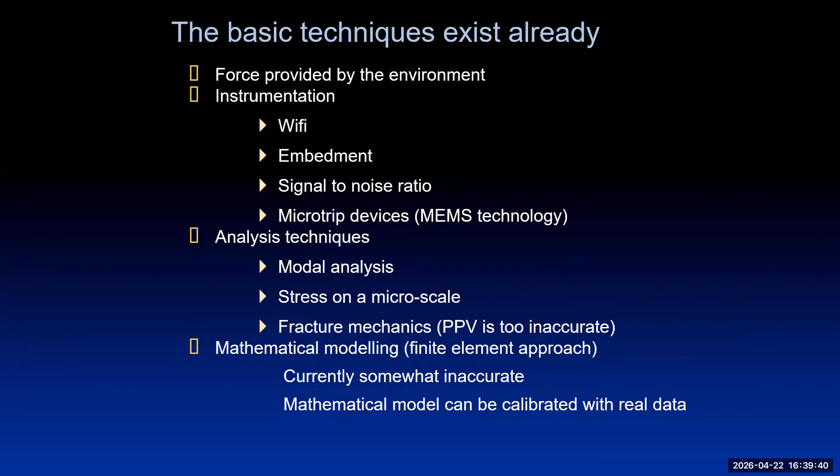Again, you're using engineering judgment. What's the E value for the concrete? What is the strength of the steel, and what's the connection doing? So these models can be calibrated with real measurements.

Alan, I think we have a 2 hour thing. What time do we need to finish, Tom? At 5 o'clock? I wonder if we have too many slides to go through. We have 20 minutes to go. How many slides are left, do you know? Oh, quite a few. All right, well, we want to finish them, so I'm going to try and move a little quicker.

This section is about how can we use a force. In other words, how can we do this holistic measurement of the integrity of a structure? First of all, we need a force. So how are we going to create that?

This is the Van der Hoven spectrum of wind forces, operating between one cycle every few days up to one cycle every 10 cycles per second. On the right-hand side here, we've got normally what occurs in practice, and there is the spectral gap.

In other words, there is an area where there's not too much wind, but then there's a peak which will give us one cycle every 2 days. There is a peak of one cycle every 4 days. In other words, if a system is passing a point on the Earth, it will on average take 4 days to pass by that point.

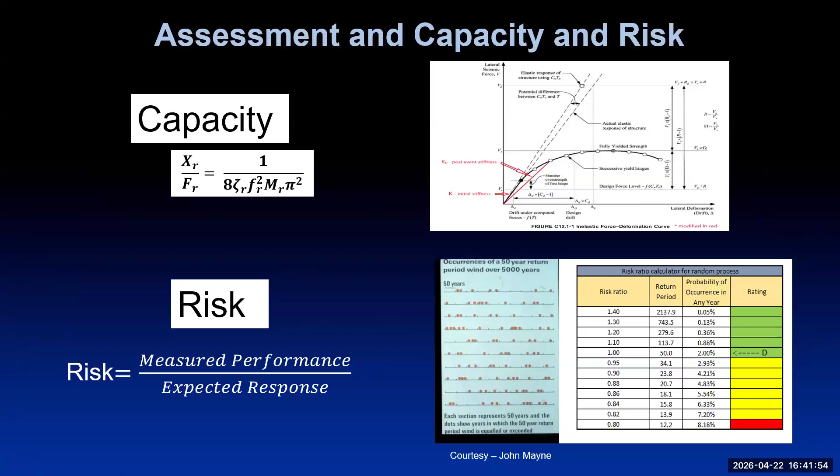And this is what we do to produce our model. We're using the second law of motion: mass times acceleration plus stiffness times the displacement differential between floors of a building equals the force, F3, which occurs at that point. You put all these together, and now you understand completely how to do a mathematical model. You can do that quite easily. Lots of systems have these available for you.

But the thing that is missing is damping. And actually, damping is an indicator of energy loss. And energy loss occurs when you've got a problem with a structure. So in other words, yes, you can do this through finite elements, but additionally, you need to look at the damping as well.

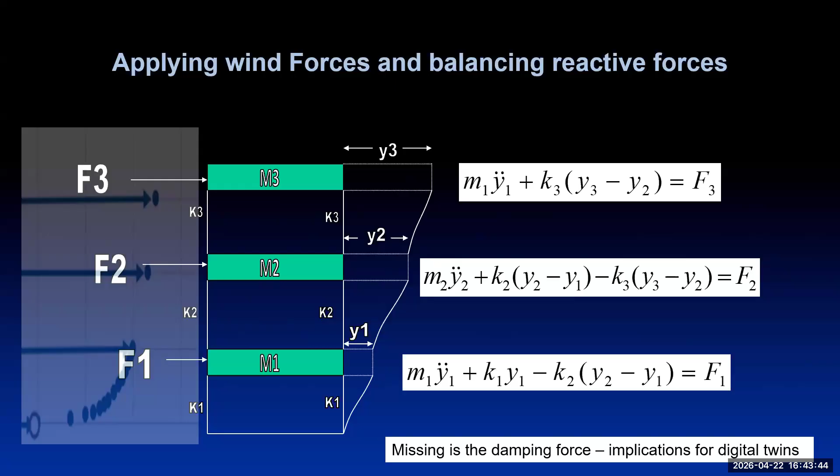Okay, well, the issue of damping, I want to clarify. The Japanese code actually separated them out very nicely. You have structural damping, you have radiation damping into the ground. You have all kinds of different levels of damping. Structural damping is something that can be measured under ambient conditions. Overall damping can include a lot of sources that are force-driven and response-driven within the structure. So being able to separate them effectively and measuring structural damping effectively is really a powerful tool, because it becomes a proxy for damage detection.

Okay, so what is a force? Any action that tends to maintain or alter the motion of a body or distort it. What is an action? Wind forces created by differences of pressure in the atmosphere, earthquake - a fault comes unstuck and generates vibrations, and flooding forces caused by moving mass of fluid.

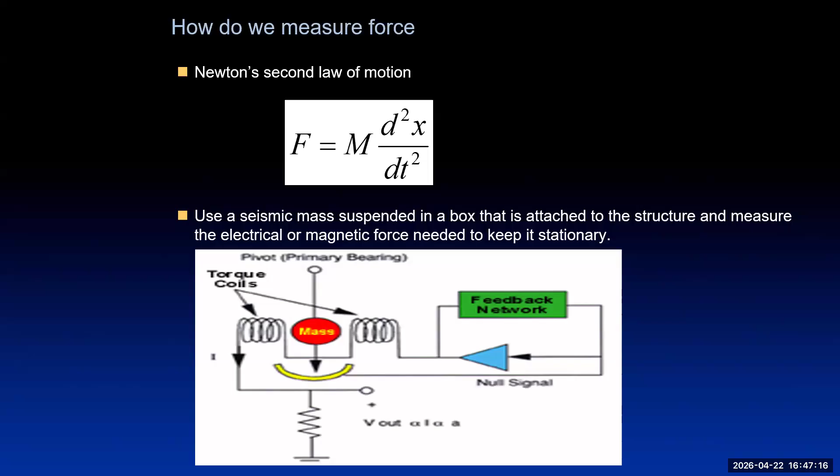Well, yeah, to add a little clarity, that instrumentation is becoming more and more automated, and we can put sensors in structures. We can put them on for hours and take measurements and do modal analysis and things like that. So using instrumentation should be done broadly, just to take the guesswork out of these assessments.

And the building started slowing down in its vibration. And he measured the change in damping. And what was really interesting, it went from 2.65 at 10 times the amplitude down to 1.37% damping at a relatively modest amplitude. And the frequency likewise changed. It went from...

It got stiffer as it went on. So there's a nonlinearity associated with this. Damping changes significantly, frequency changes a bit. Now this is well within the elastic limit.

So it's really important to realize that both of these elements are non-linear, but they can be measured, and how non-linear they are within the quote unquote linear elastic range is very relevant. If you've got a lot of damage, or you have a fundamentally non-monolithic structure, those non-linearities are going to be quite broad, and you're going to see quite a lot of interesting difference.

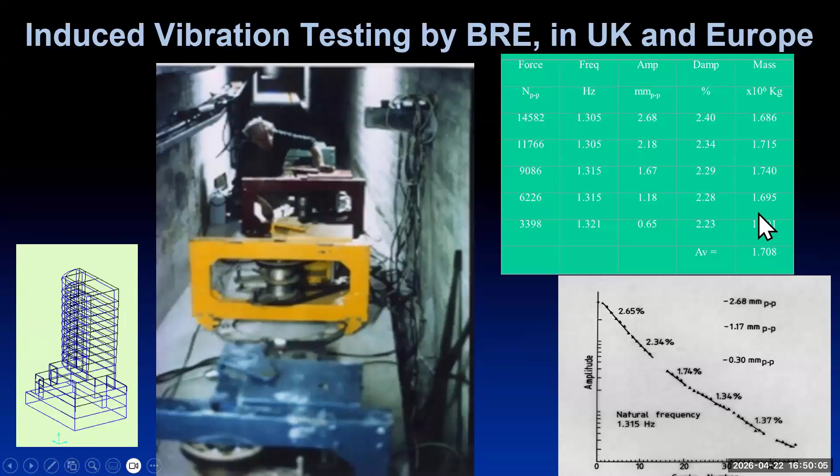Now that's an indication that this was working okay, and the measurements of frequency and damping were okay as well. So yeah, that became the check because you knew the mass wasn't really changing. It could change a little bit, but it really wasn't changing too much. So you knew mass was a constant, and you put it into that equation, and you knew what your force was because you're applying it, and you knew what the frequency was because you're measuring it, and then you saw what the amplitude was, and so you knew the displacement, and you could measure the damping as you did decay. And again, your mass was the check. So very interesting body of work, never to be repeated.

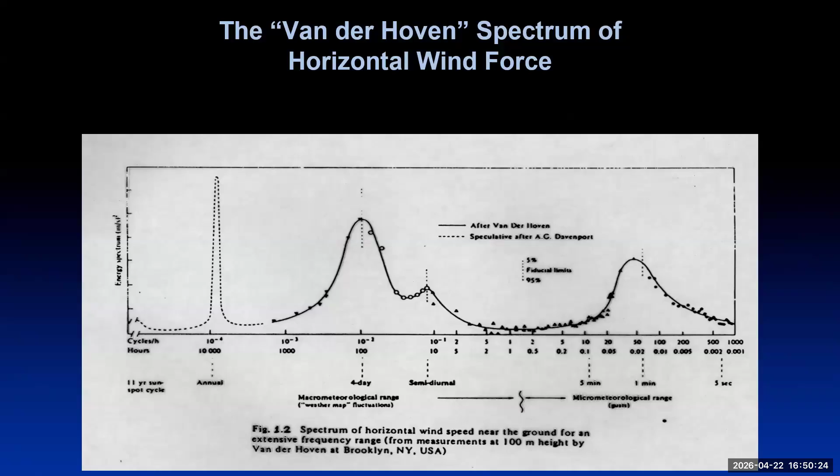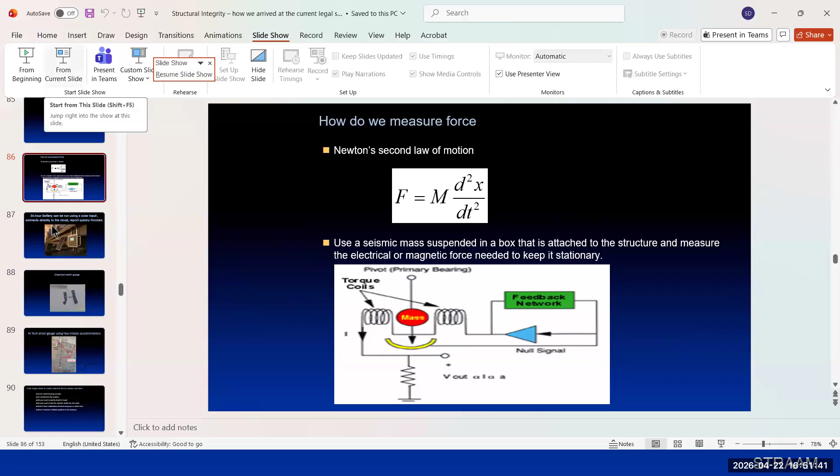There's a point to be made here. Perhaps I can take over and put some sharing on here. Sure. You go ahead. Okay. You gotta. Now,

This is the future. This is where we can have a new device which is battery operated. It can run on solar input and it connects directly to the cloud. And because of that, a report of the structure can be performed very quickly.

If we go into what Tom was saying, we can have not just this old type of crack gauge, but we can use accelerometers on either side of a crack. And when you do that, you see in 3 dimensions and to a level of 10 to the minus 10, 10 to the minus 12 of a meter of what's going on inside there. And then we come back to those scanning electron microscope studies. We actually see if a crack is occurring at a very small level.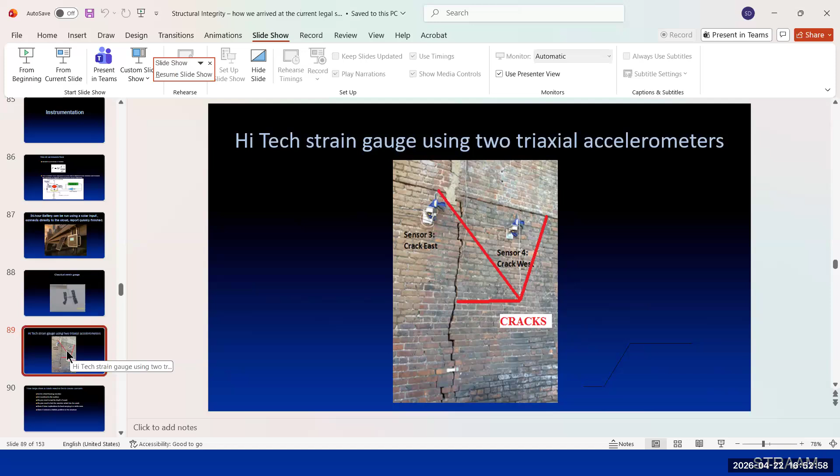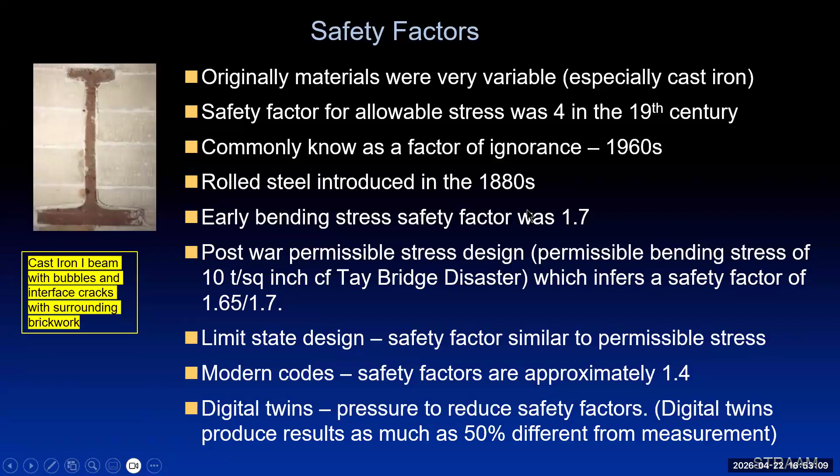Oh, sorry. You're like at 80 something, Alan. Yep. Yeah.

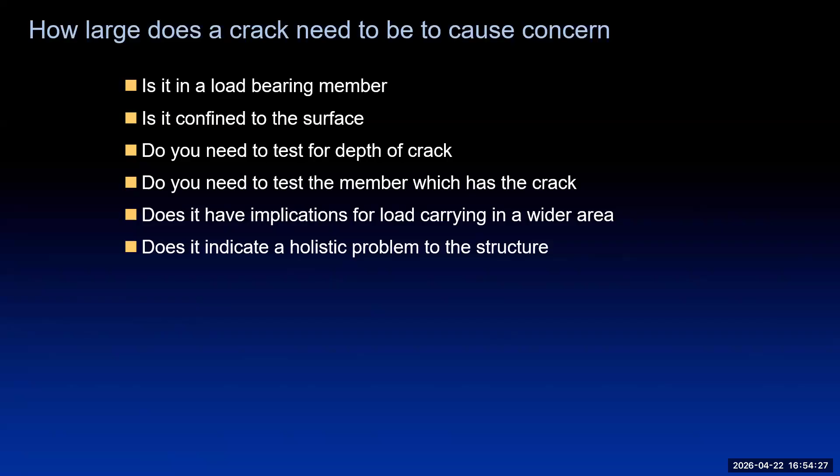So in other words, what I'm saying here is the very simple device of several hundred dollars will tell you in broad terms what the crack width is going to be. But there are different aspects of a crack which are important to a structure. And now, spectra.

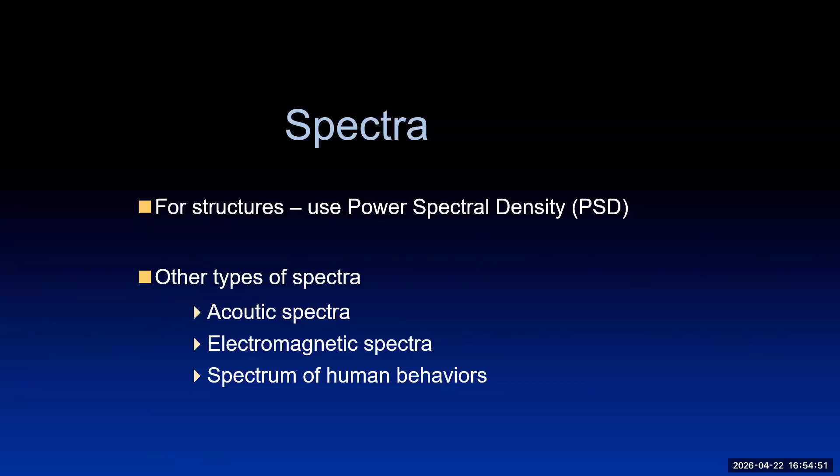We can tell a lot about what structures are doing using power spectral density. And we have other types too, of course—acoustic spectra, electromagnetic spectra, and spectra of human behaviors.

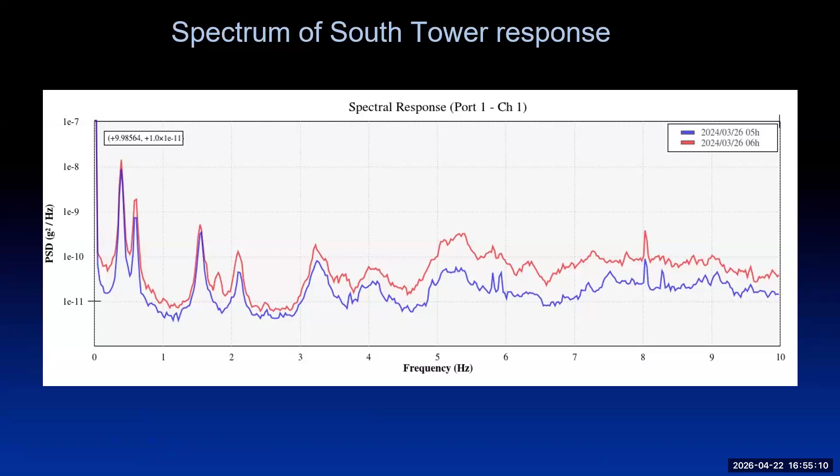This is one which occurs just in a structure, taken in both the north-south and east-west directions. You see changes in that, and lots of modes of vibration as the structure behavior becomes more complex. A peak in the spectrum will be an indication of the structure wobbling, and as the frequency goes up, it gets more and more complex.

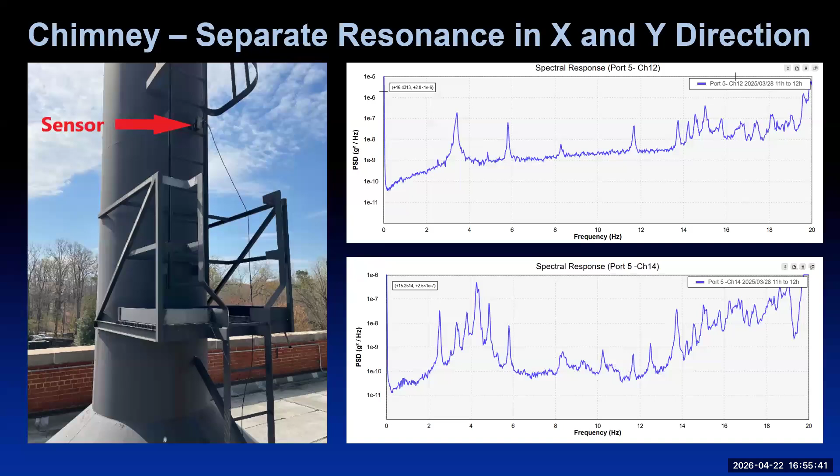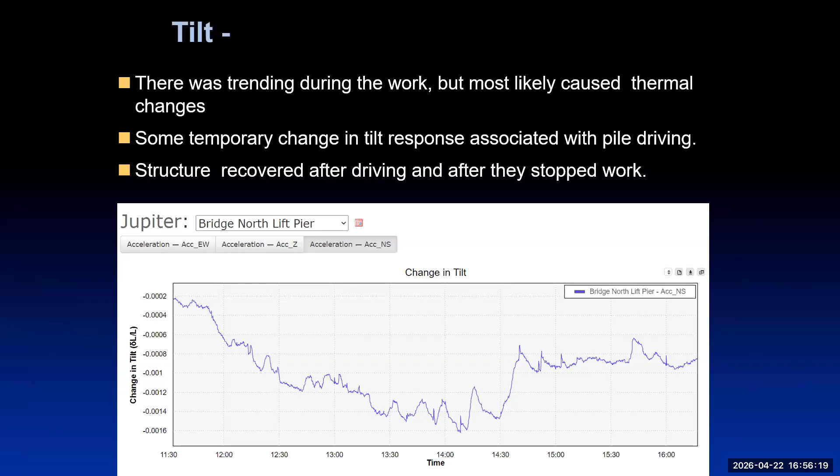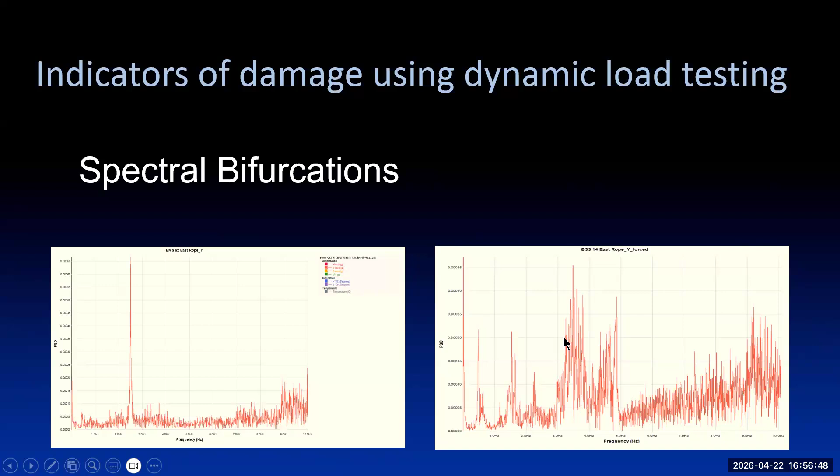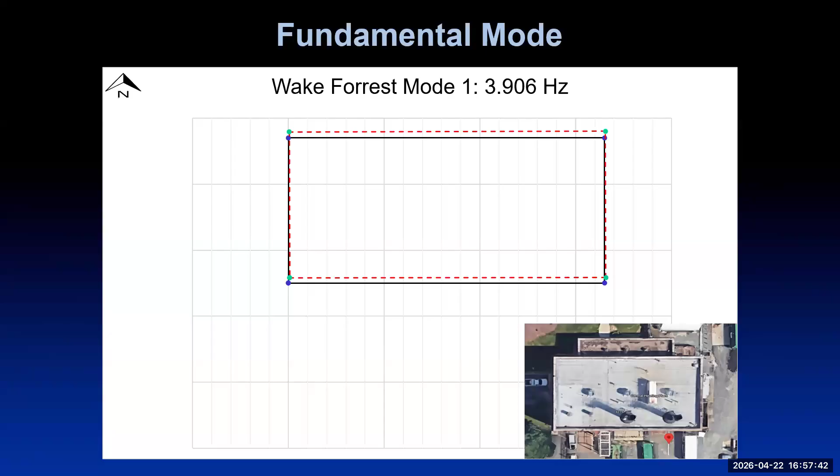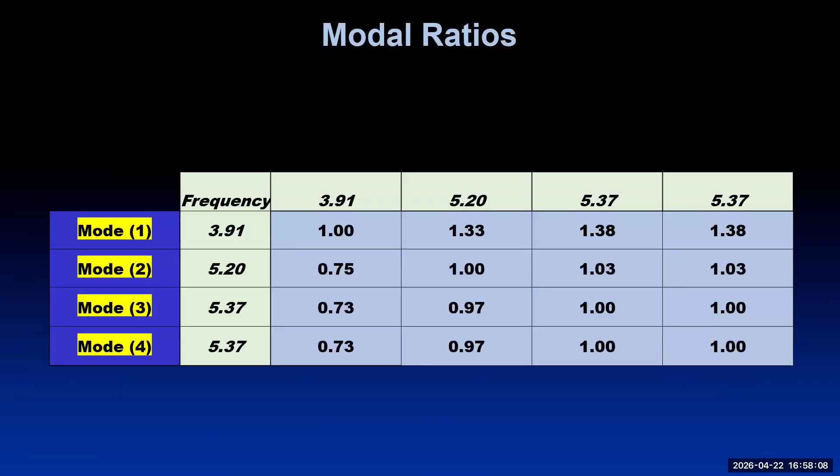Looking at fundamental modes, these mode diagrams tell us that the structure is moving from side to side, and we find unusual occasions where all sorts of things are going on. We can find that the modal ratios may change over time, and if we've taken a baseline, we can see what those changes are.

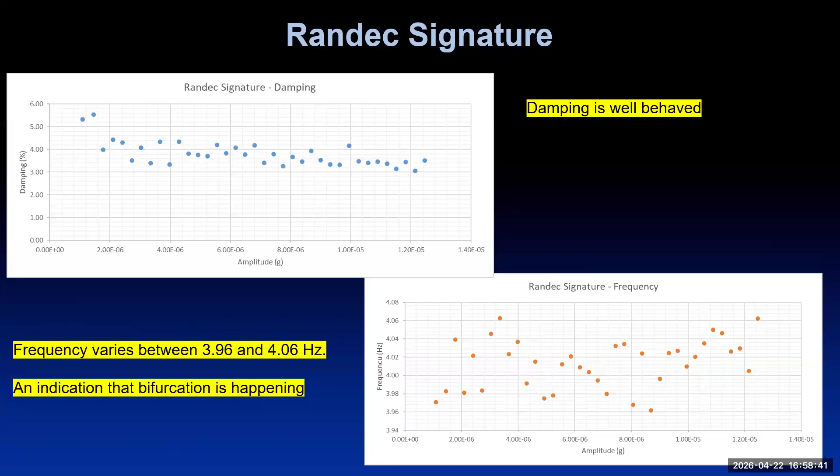The big one is looking at damping. You can see a reasonable damping curve—we've got amplitude and damping there—and another one in which there's a lot of scatter. If there's a lot of scatter, it means energy is being dissipated at various amplitudes, and if you use fracture mechanics, you can see what that means.

In this particular case, we can use a risk ratio. Using those equations I showed you earlier, they will give you an idea of what the capacity of the structure is compared with what was expected of the building. With this, we can actually find a risk ratio.

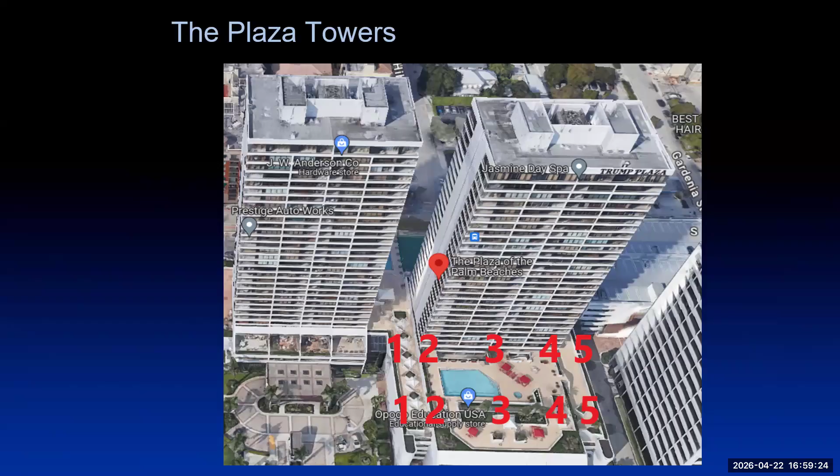I wanted to say one more thing—a building in Florida that we looked at. You actually look at ten of them constructed at the same time. They were 50 years old, and their capacity, measured with the method I've been talking about, varied from 37 up to 72 metres per second. Why? They were close to water, and that actually tells you why some municipalities have decided that you must have a 25-year period between inspections of a structure.

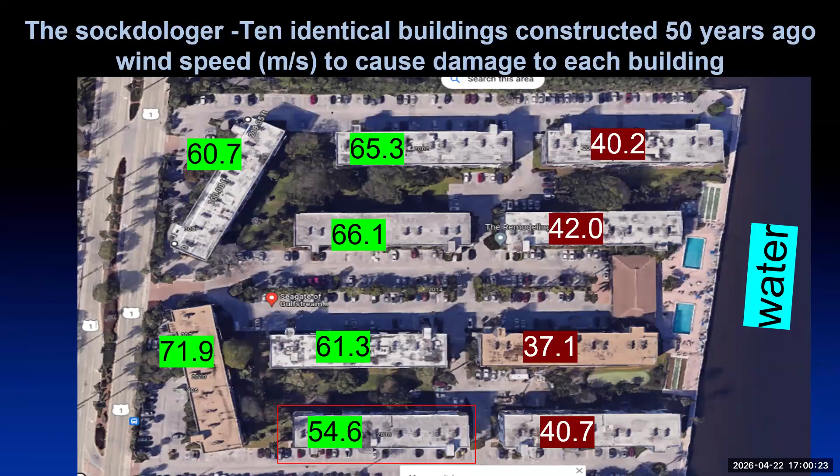Ladies and gentlemen, I'd just like to finish up by coming back to the 12 tables of Rome. There is a direct line through in the law between what they produced and what we produce these days. In practice, you have in the United States the conditions for people in there, and that was first produced in Rome 450 years BCE. So we have things to learn, and we can.